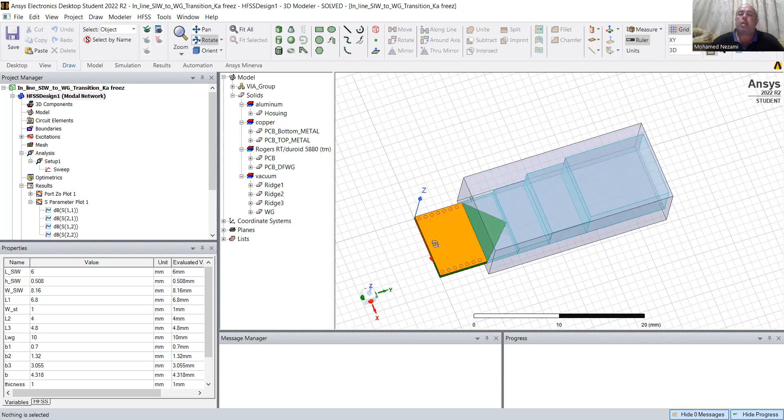substrate integrated waveguide, which is nothing but a printed circuit board. And you can refer back to my videos. There is a whole video on SIWs, so you can refer back to that video for this purpose. I welcome you to do that if you like.

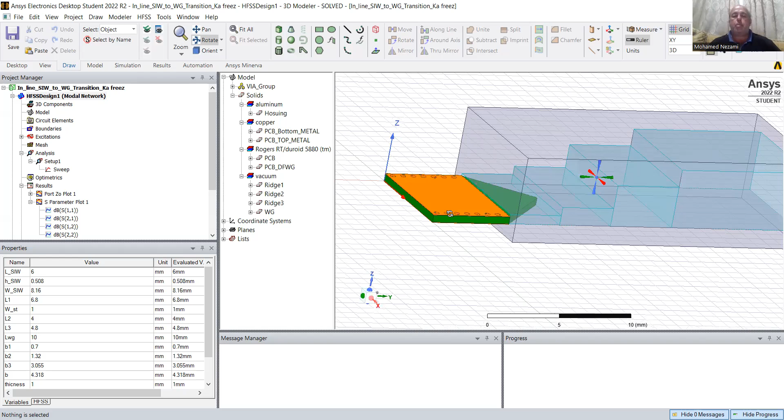But anyway, it's basically a PCB that is double-sided, top and bottom, as you can see here, and it's stitched with vias along the sides in here. And this actually, when you feed it via an RF signal on this side,

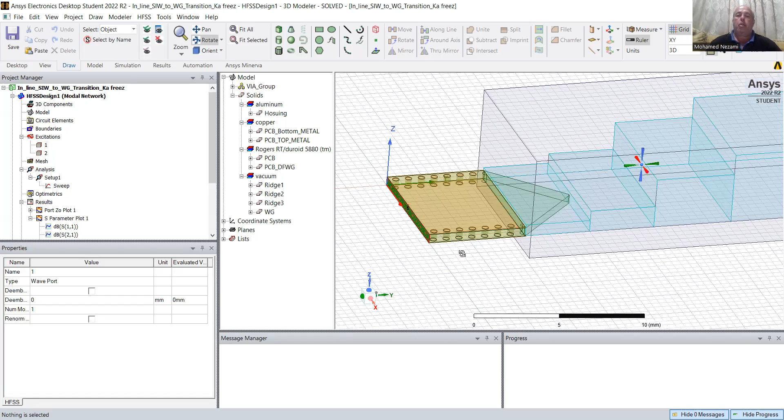it becomes a waveguide actually. The only thing about it is the height is the substrate height, basically. It's a reduced size waveguide, basically, rectangular waveguide, okay?

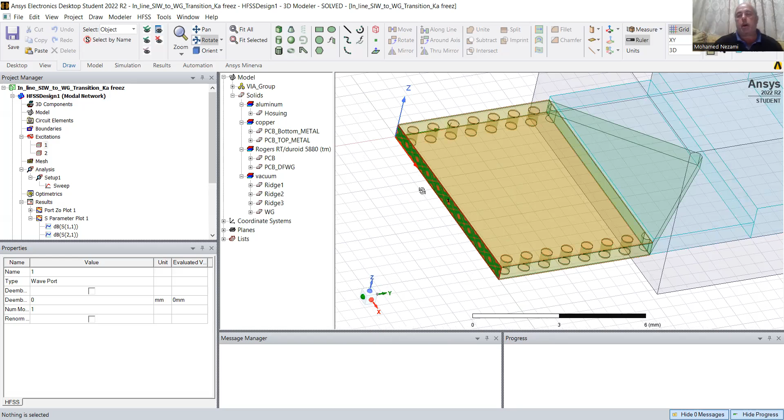Now, for the TE10 mode, it doesn't really matter how high it is. It's just a matter of impedances. But for the mode to propagate and for the cutoff frequency, the height becomes basically irrelevant. It's not an issue as far as propagation or the mode, okay?

Now, why do we use substrate integrated waveguides? Because usually we have this in a transmitter or receiver. We're either getting a feed from here, the signal comes from an aperture of some sort, a phased array aperture, or a single parabolic dish, or a patch that is fed by a waveguide.

And then eventually we have to get that signal into planar form so that we can process it. Meaning for the downlink, it's basically the low noise amplifier and the block down converter, and then the digital signal processing section that implements the demodulator.

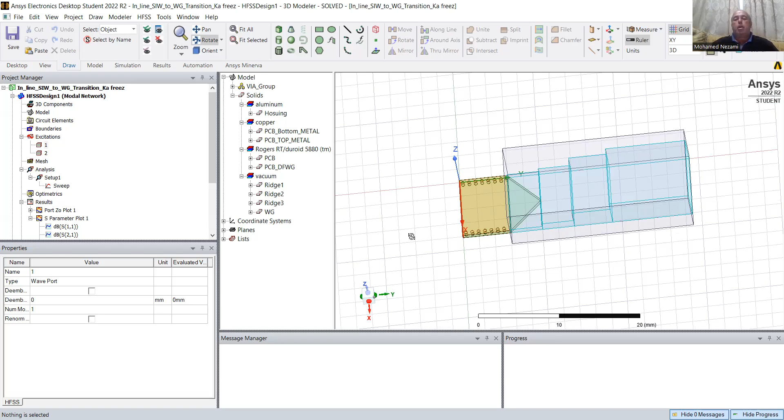Likewise, it's also usable when you have a transmitter on this side and you want to transmit the signal. This signal here might come from a GaN power amplifier, and you might want the output to get fed to a parabolic dish or an aperture, going from the substrate integrated waveguide, SIW, here, we have to do some kind of matching because the impedance looking into the waveguide...

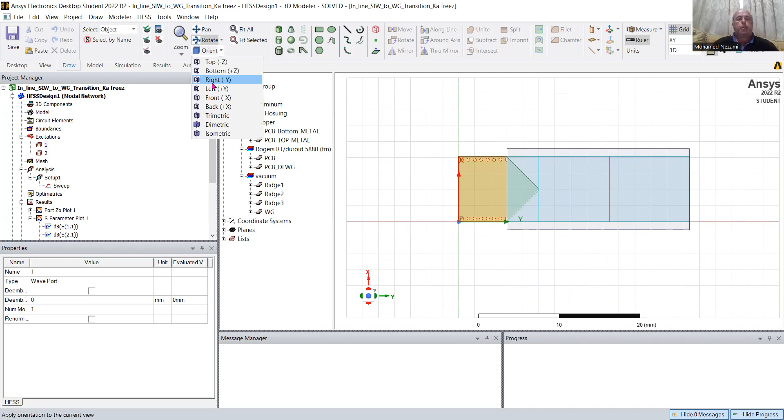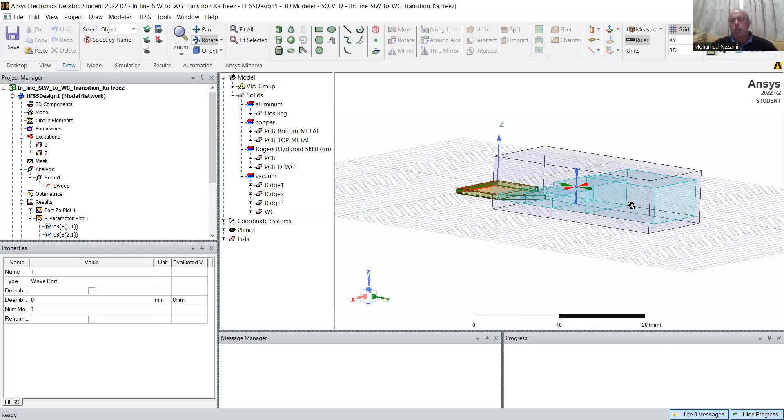Let me look sideways on this so that we can see it better. So, this is the SIW. We come into the SIW and then we have some kind of stepped ridge waveguide. What you see here is that the dark color is basically the air-filled cavity inside the waveguide. So this section from here to here is the standard waveguide.

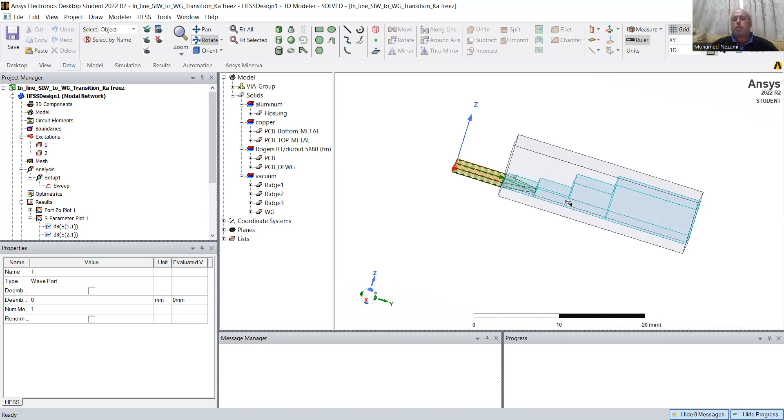And this happens to be in the Ka band. And then from here to here, we have a stepped height, which is basically a Chebyshev transformer with a quarter wavelength each length. The purpose of this is to match the substrate integrated waveguide, the printed circuit board here, to the TE10 mode here, okay? In a minute, we're going to see how that is done. So let's get started.

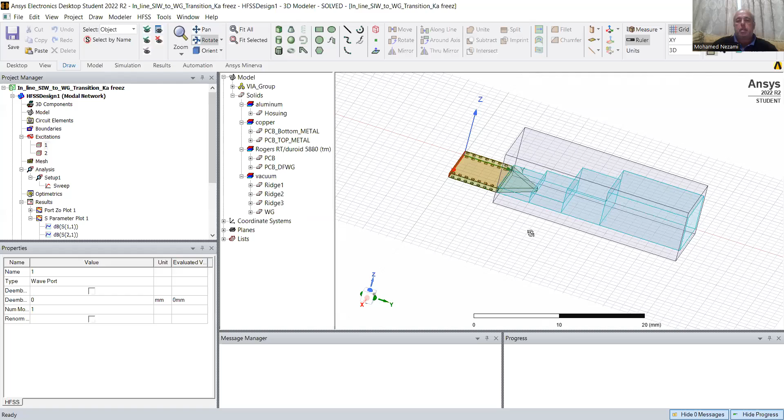Between the SIW and the standard waveguide, there are sections - three sections in here, basically a Chebyshev. So we have the SIW, the substrate taper, which is in here, and I'll talk about that in a minute. Then we have these three sections of a Chebyshev transformer. The first one is loaded with a dielectric, an extension of the dielectric of the substrate, the SIW. We strip the copper from this one and have a little taper that takes the signal, as you can see here. This is basically the taper section, an extension of the substrate, so it goes in like this.

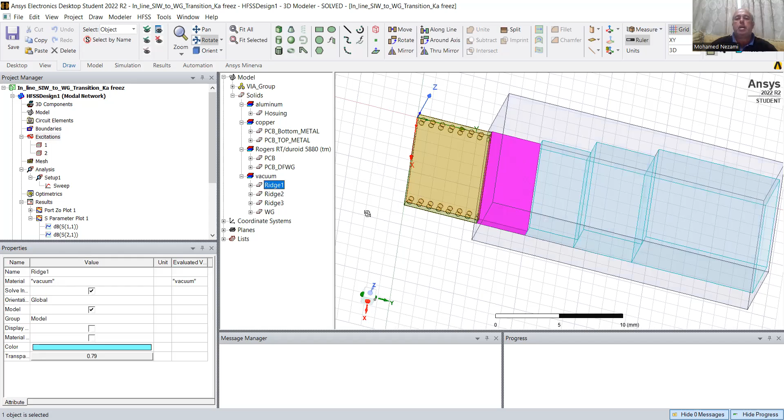The reason to do this is because we need to make a gradual transition for the E field so that we don't get reflections. There's more to it that's beyond the scope of this session right now. So having this section here - this first one in here is really a dielectric loaded, or dielectric filled, waveguide. So we've got a substrate integrated waveguide, we've got a dielectric filled waveguide, and then we've got three sections of air-filled waveguides.

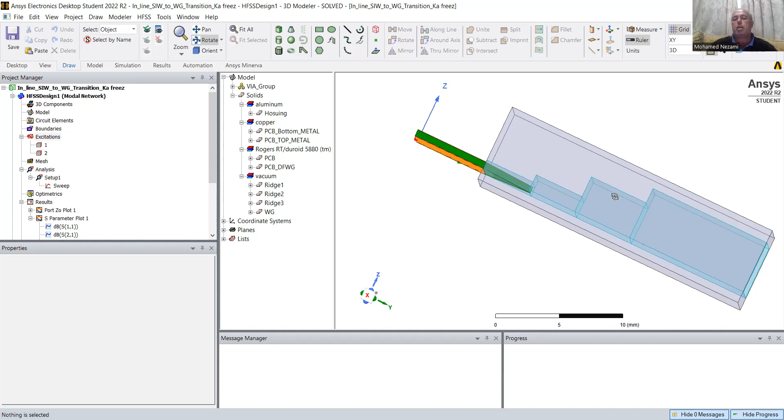The thing about these is that the height of these varies and gradually changes until you get to the standard waveguide that is for the rest of your system.

Let's get back. So again, we have the sections that we have in here - four sections. We have a substrate integrated waveguide, we've got a dielectric filled waveguide, which is just a small section of a Chebyshev transformer that has a tapered section of the substrate material, the dielectric material. And then we have three sections in here - all three are the transformer that matches the substrate integrated waveguide to the standard waveguide. That's what it is.

Usually, the standard waveguide has an impedance of, say, 260 ohms in this case - I think it's 260-something ohms. And then the substrate integrated waveguide has an impedance somewhere around 23 ohms, depending on the width that we have here. So we need to match 20 ohm to 260 ohm, and we do this in the middle. That's what we're going to present a little bit, but it's all simple basically, and it's a matter of using tools like ESOF, ADS, AWR, Genesis, and SystemVue.

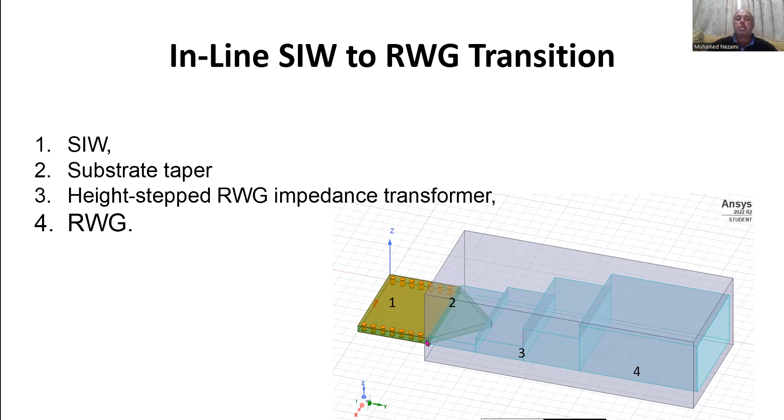We have a multi-section quarter wavelength design calculator in there. So you can calculate, you can give it basically the impedance in here and the impedance in here, and it does the matching for you.

So why do we want to do this? Why is this transition unique? First, the assembly is compact because the waveguide comes in and the feed goes out on the same axis, so there's no perpendicular sticking out pieces. The other thing is that the field propagation direction in the waveguide is the same as the planar transmission line, which has some benefits as far as design difficulty and so on.

Then of course we've got matching elements between the dielectric filled waveguide, DFWG, and the rectangular waveguide, which can be based on ridge waveguide sections. It's low cost, much lower than, say, because all this is a printed PCB that you get fabricated. There's no components to assemble on it, no soldering, and there's a waveguide assembly. You just plug it in, or sometimes they put epoxy or some sticky material in there, and you just plug it in. That's it, no soldering, no screws, nothing. So it's low cost in that sense.

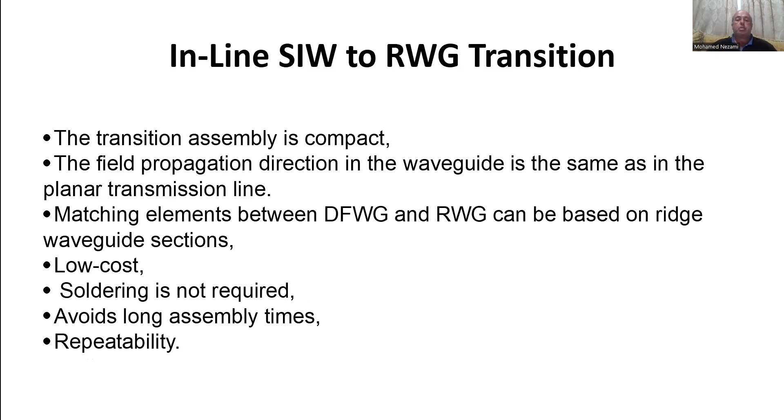Now, why SIW? Why not microstrip or stripline? Because we have those transitions and we've covered those. In fact, the next video talks about a microstrip line to rectangular waveguide in-line transition. I'd already done it and was going to present it in this session, but it would have been too much, two of them in one video, so I split them up.

So SIW first: it has low loss transmission compared to microstrip lines, especially at Ku, Ka bands. You can refer to books on that and look it up to see why. It can handle high power because it's really a waveguide, a TE10 propagation mode waveguide, unlike microstrip, which has limitations on that.

It is suitable for integration, same as microstrip line, because if you have a low noise amplifier, it would be the same card that comes in and has the SIW into the waveguide assembly. That one has the LNA or the power amplifier assembled on it as well. It's also suitable, easy to fabricate, as we mentioned already.

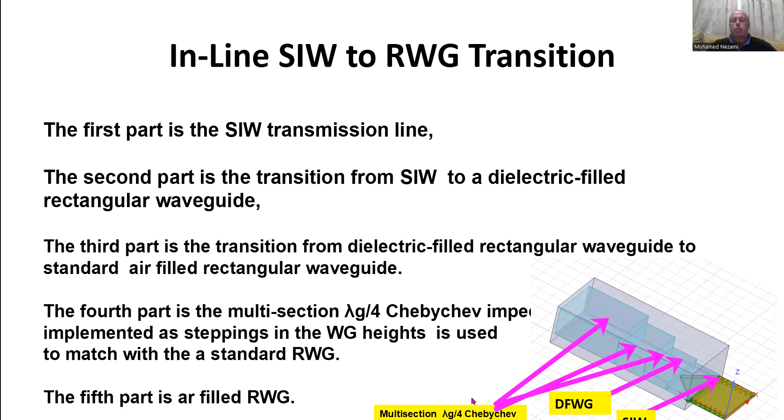The fourth part, in this case, is the multi-section lambda G over 4 Chebyshev impedance transformer implemented as a stepping in the waveguide heights, that's this guy here. The fifth part, sorry about the typo there, is the air-filled waveguide, which is a standard waveguide here.

Now, an important remark: we know that the height of the dielectric filled waveguide is equal to the substrate height, or thickness, but the width is exactly the same width as the waveguide. So as you can see, this waveguide and this waveguide have exactly the same cutoff frequency, supposedly, even though they have different heights. The height basically only affects impedance.

TE10 mode propagation is related to the width, the A width of the waveguide, which is the broad width. Therefore, reducing the height B of the reduced air or dielectric filled rectangular waveguide does not affect the propagation of the TE10 mode inside the waveguide or inside the stepped ridge transformer.

Now this shows an example. Of course, why would we have 3 in here? I just happened to pick 3 for myself, based on the fact that many publications I've looked at used 3. They said 3 is sufficient a lot of times for practical bandwidths of signals like 5G signals and SATCOM signals, for the bandwidth that they have.

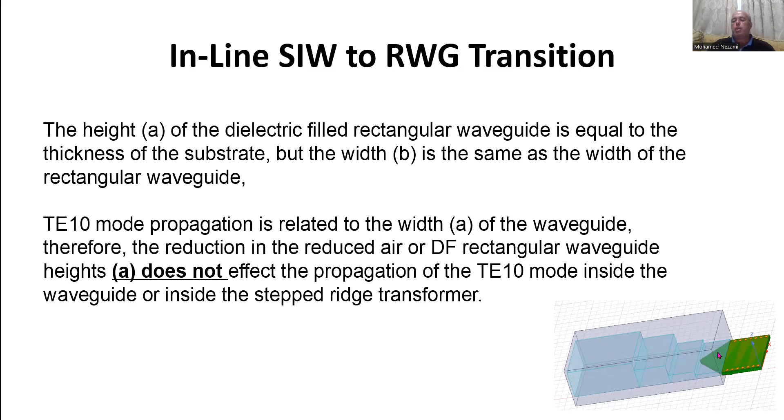So in the waveguide, the height is proportional to the impedance. If this standard waveguide section has 260 ohms, you can see this one is almost like 70% of that, maybe 200 ohms. If this is like 260, this would be like 170 or so, and this would be like 120, and this would be like 70 maybe.

And that's what you end up with a lot of times. So you could implement this transformer, the one that Pozar showed, and some of the calculators can come up with these impedances. These impedances, of course, the length is equal - it's quarter wavelength. That's the starting point, but the actual final designed optimized lengths are not the quarter wavelength.

They deviate a little bit because we really don't have a source and a load that is pure real - we always have susceptances. And of course the steps, the sudden change in impedance, that's capacitive parasitics that we don't account for in this calculation of these impedances. That's why when you put this in, you get a nice plot like this, with minimal ripple.

But as soon as you implement it with those same impedances, be it waveguide or a metal ridge to a coaxial inline transition like I did in the last video, it doesn't come up exactly optimized. That's where the beauty of and the need for 3D modeling using HFSS or some other package, CST or whatever, comes in - where you put it in, parameterize it, run optimetrics, and get it optimized.

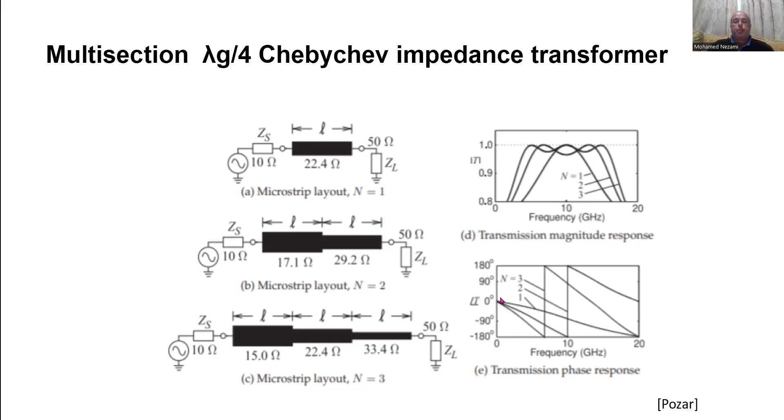Now, last time we did this transition - a coaxial inline, coaxial to waveguide transition. In there, we took the inner conductor, and it has a ridge that transformed the impedance from coaxial impedance, 50 ohm, to the impedance of the waveguide, which was somewhere between 200 and 300 ohms, if you recall.

Now what we're doing is a little bit different, but it's the same principle. So we have a waveguide. The way we start designing this is we have a waveguide that you pick as your standard waveguide to implement your system, or you're given that most likely. The first thing is you want to find the impedance of that waveguide - you take the ratio of B over A, and then you can get that number.

And then, of course, you have the impedance of substrate integrated waveguide. There are equations to do that. And then what you need to do is, from here to here, come up with a series of transitions stepping in heights until you get from the SIW impedance to the waveguide impedance, which is calculated here.

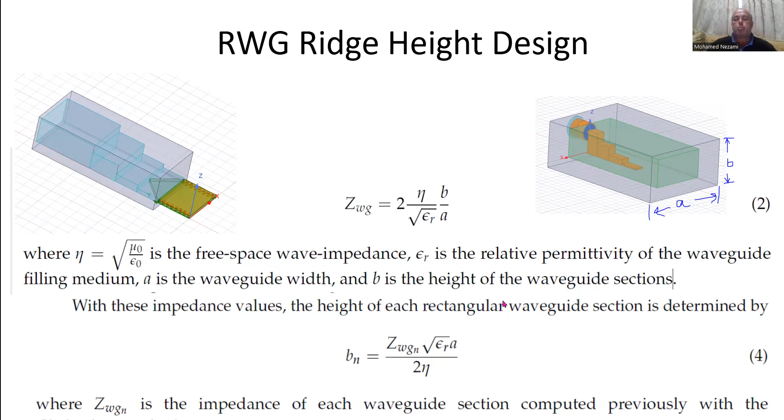So it's very straightforward. So again, what I did is I got a few things that can help you do that design and understand the theory. The first one is chapter 5 in Pozar's book.

And for Pozar's book, you don't have to go out and buy it. There's so many people—I don't know, it might be out of print and doesn't have a copyright—but unfortunately for them, there are many places that have the book in PDF. I don't know, the edition shown here is the 4th edition. This is a very popular book. They're way out now, 6th or 5th edition—I forgot how many they went.

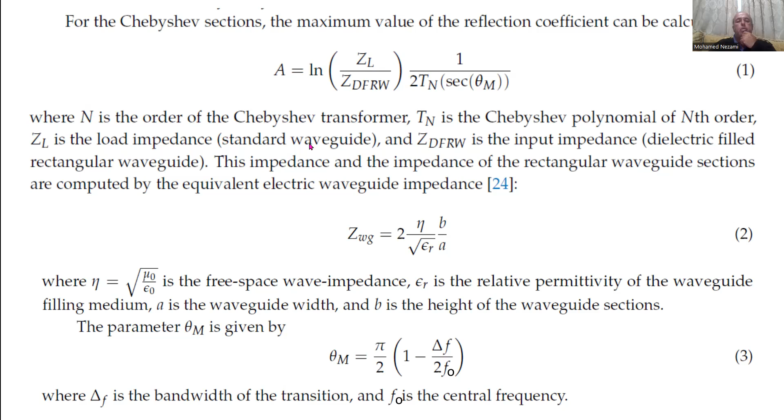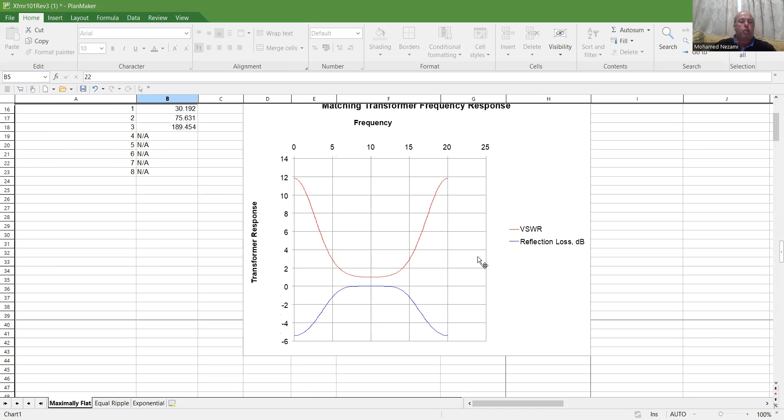Now let's go to—like I said, many people made calculators for this. So here's one calculator, this one here. You can do maximal flat, you can do equal ripple—equal ripple is basically Chebyshev—and you can do exponential. There's even one that has a Klopfenstein, the tapered Klopfenstein transformer.

So you can see here, for instance, if the input impedance is 50 ohm, and let's do the one in our case, which is about 20 ohm, and the waveguide impedance is 267. Of course, we don't want to go 8th order, but if we go 3rd order...

Okay, so we got these impedances: 54, 73, 97. And it gives you some calculations here of basically the impedance ratio, fractional bandwidth 160%, the worst case return loss. Oops, that doesn't make sense here—oh, because of the frequency.

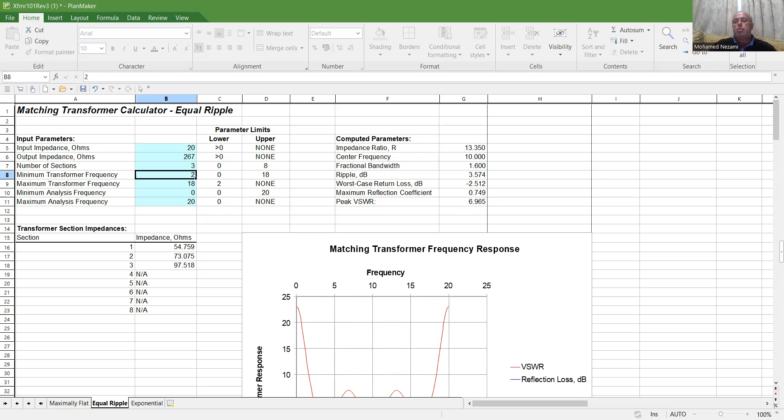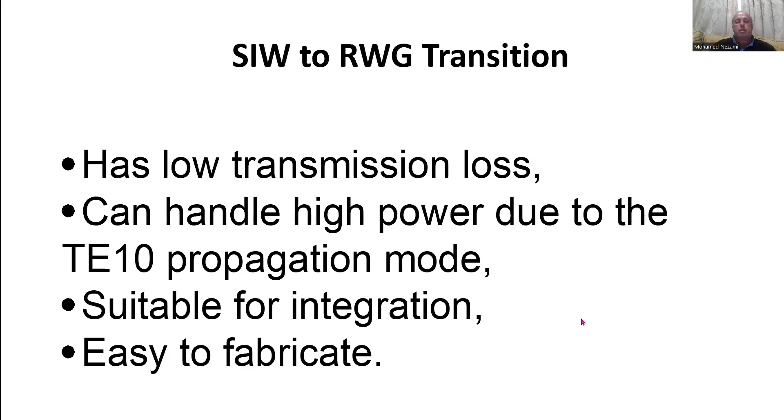Anyway, so you can use this, and if you don't like to use that one, there's some MATLAB code you can use. All right, so let's get back to here—I apologize for this, this is not PowerPoint—oops, what are we doing?

Oh, I clicked on that link. Okay, so let's get back to this.

So let's go to the design. The first thing I did here is I designed the substrate integrated waveguide. Once you do that, you have the SIW section. The length doesn't matter since it's just a piece, so you can grab say half an inch or one inch. The material is Duroid 5880. And this is what I got: the cutoff frequency is about 15 gigahertz or so.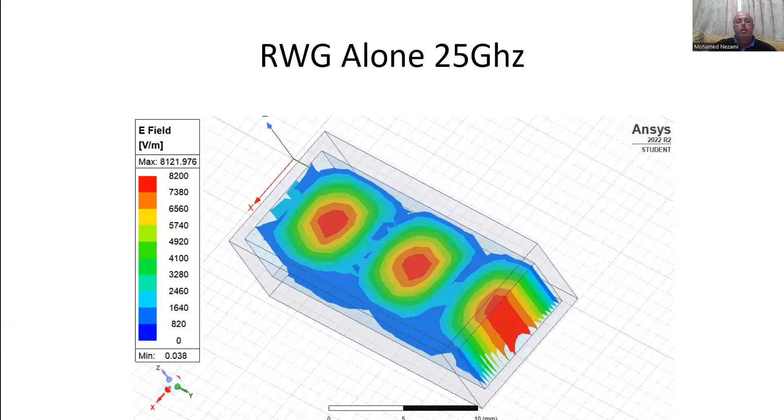And then finally it's to the waveguide. Oh, it's 360, not 260 - I apologize, I said 260. So you can see the impedance of the waveguide, and you're sure the waveguide is fine.

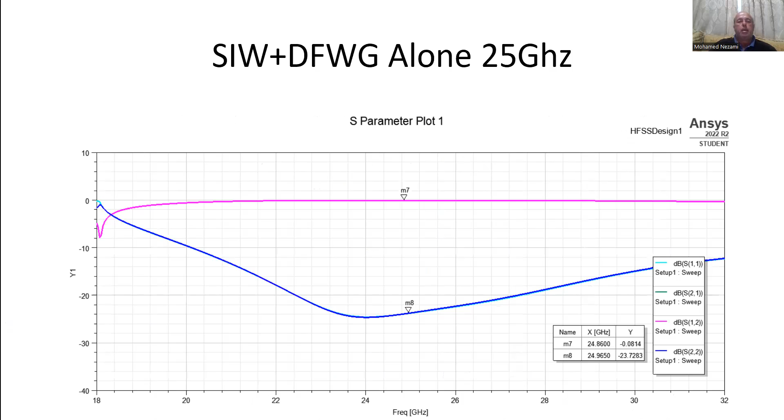And again, you start building piece by piece. So you go back and put the dielectric filled with the first section with the tapered part, and we see it's working fine and the performance is good. Then we go to the next step, which is the dielectric filled with the 3 sections, without the waveguide and without the SIW. We verify that it works - good return loss and impedance-wise.

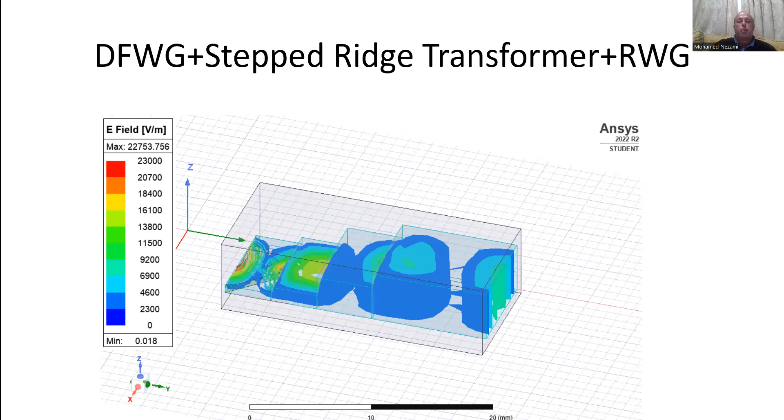And then finally we put in the waveguide, and we get this response, okay? We are sure now it's fine. And then finally we put it all together, and that's what we get. We verify the E field is fine, there's no leakage anywhere. So you can see here that we've got from 22 ohm to 360 - that's the impedance on the SIW, and then the 360.

Now, somebody might ask, why didn't you start with 50 ohm? Well, it just happens that when you start the SIW, you don't want to design for 50 ohm. We're usually feeding some kind of LNA or power amplifier, so that's not a problem because we can change that design - it's not exactly 50 ohm. If you want to go to 50 ohm, you have to transition from a substrate integrated waveguide to 50 ohm. I think we did that in one of the videos on substrate integrated waveguide filters - we went through that, so you can refer back to that video.

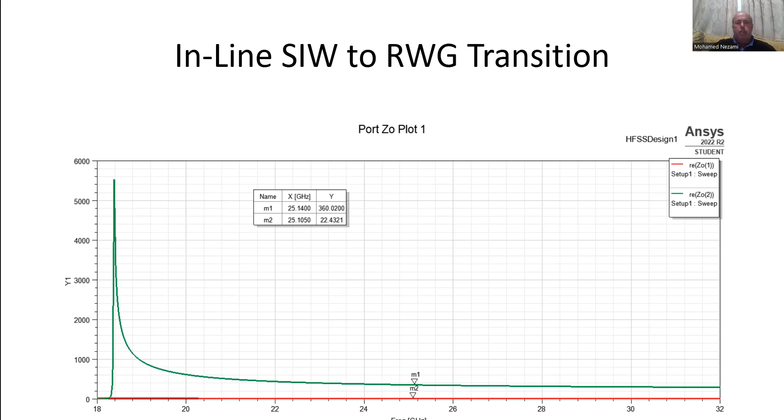So this is the final transition performance. As you can see, it's pretty nice, and the loss worst case is like 0.2 of a dB, up to 28.5. And then the return loss, of course, is this. Now this is pretty good considering that it's a board, not a waveguide assembly.

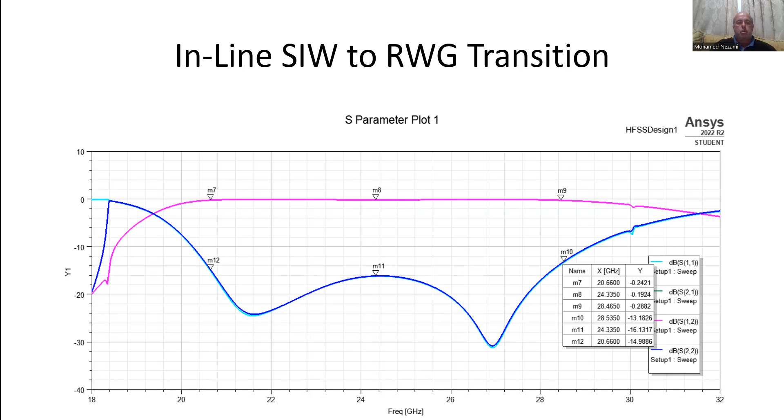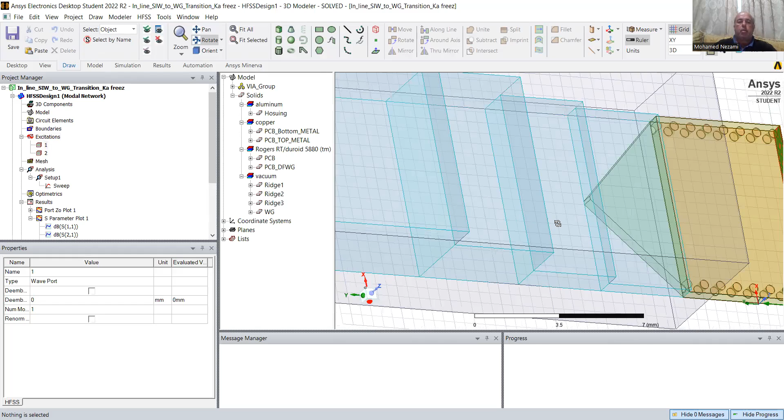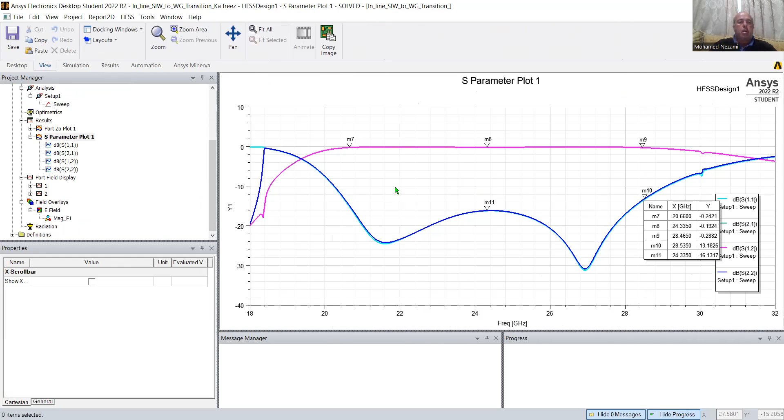All right, so let's go to HFSS and just show this. So we've got this - we feed it on one side with the wave here on the substrate integrated waveguide, and then on the other side we feed it with this wave. And then we run it. This is, of course, the performance - the impedance on both sides is basically this. So we got 22 ohms, 360 ohm for the waveguide, this one here is 360 at 25 gigahertz and 22.4.

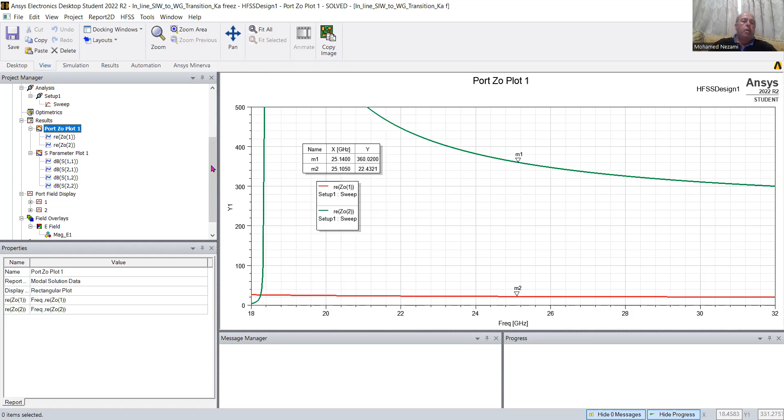And then if you want to see the E field, how it works, let's see at 25 gigahertz - this is what we've got. So let me animate this.

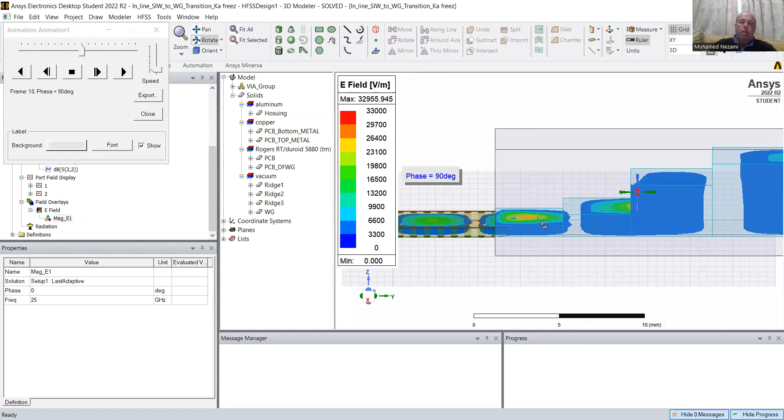So you can see how the substrate integrated waveguide, the wave comes in and starts radiating into the substrate. This is the critical area that you can see here, that's where the E field gets into the dielectric waveguide section, where the height of that waveguide is exactly the substrate thickness.

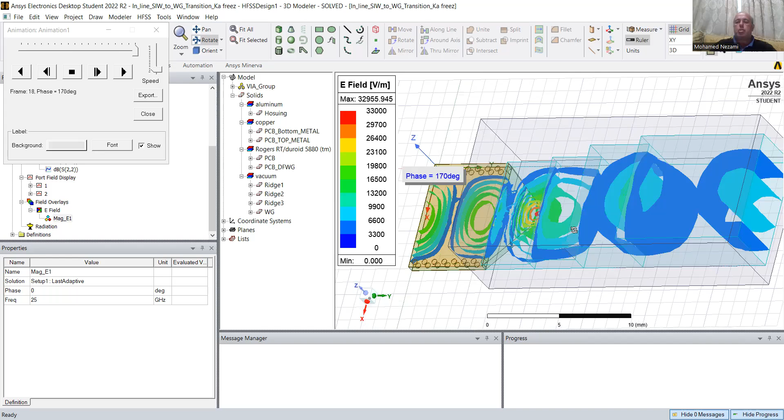And you can see that it gets loaded like a little dam right here. It's contained within the substrate. And then the signal will start gradually building up to the impedance of 300 and some ohms that we just showed, which is a standard waveguide.

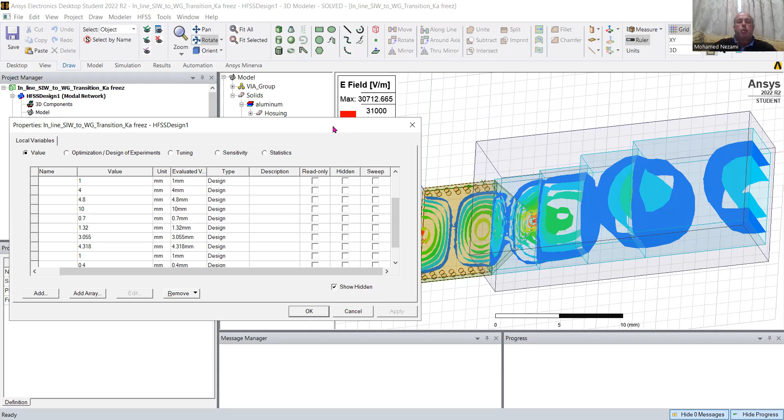Now, the way this design works, of course, you start out with all of these parameters, and they are parameterized. So what I did is I didn't run the optimizer, I just went into the setup and did the calculations, figured out the initial starting point, the quarter wavelength inside these waveguides, one for the dielectric-filled and the air-filled. So you put those in and figure out the height to give you the impedance.

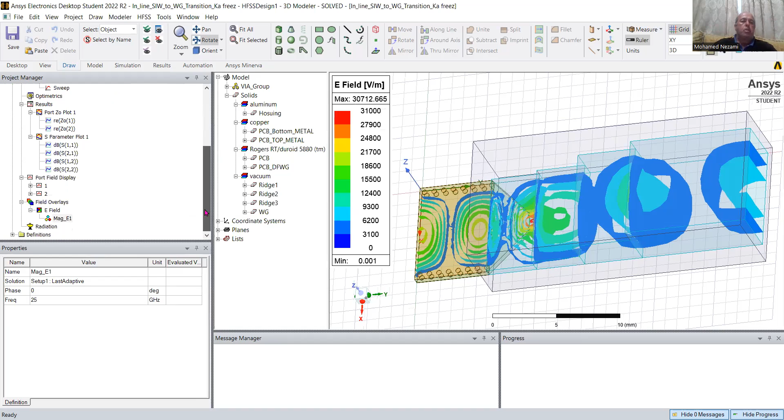And I came in here, and you can go to any of these and start optimizing or sweeping, and then pick one of the curves one by one. But you can really run the optimizer, you can go in and come in. Let's get rid of the E field first, so let's see how we approach optimizing this.

First of all, the length of the SIW doesn't matter. The length of the waveguide, the standard waveguide, doesn't matter. What you have basically is a transformer, these three stages of transformer. So you have the length of this section, the length of this section, the length of this section, and the height of all of these sections. So that's 3 here and 3 here, that's 6 parameters.

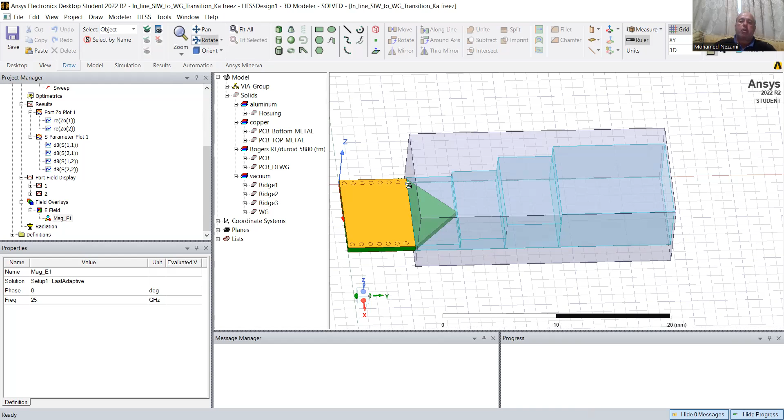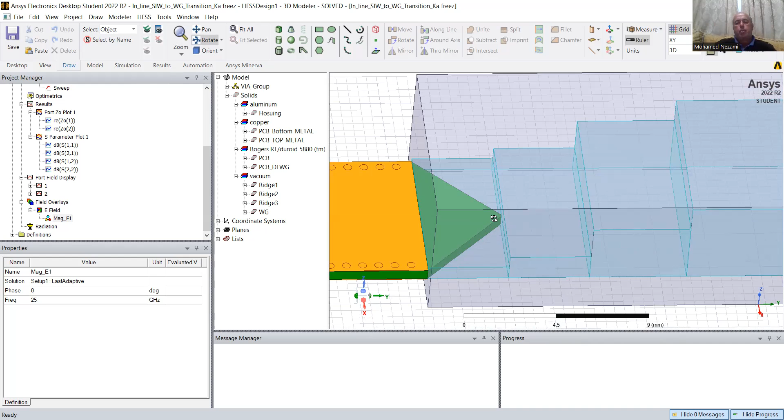And then you have the length, which is really the length of this. That determines the length of the, because the electric field has to hit the first tip in here. That's part of the design, because that's how you make sure this thing goes in. When this hits this, that's part of the assembly, how you get it tied, fixed in there. And if you have some kind of glue that basically locks this in. So this is part of it. So the length of this determines really the length of that.

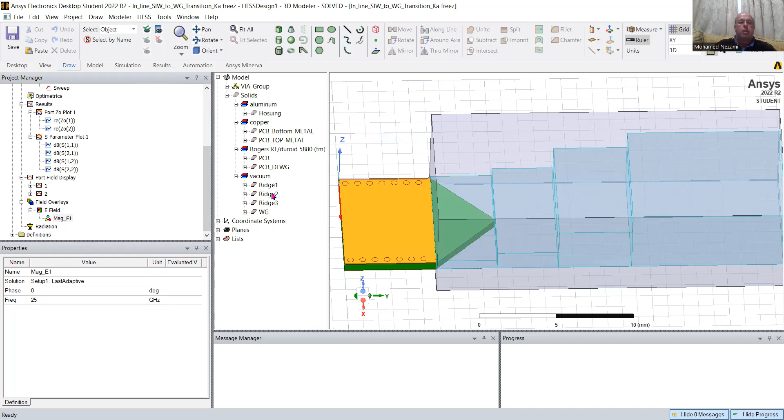So let's pick, for instance, an endpoint. Let's say one of those sections, the middle section in here. If you can see, the Y size is L2. So what I'm going to do is try to tweak L2. I can come in here, go to L2, and then you can put this as tunable. You can sweep it, like this.

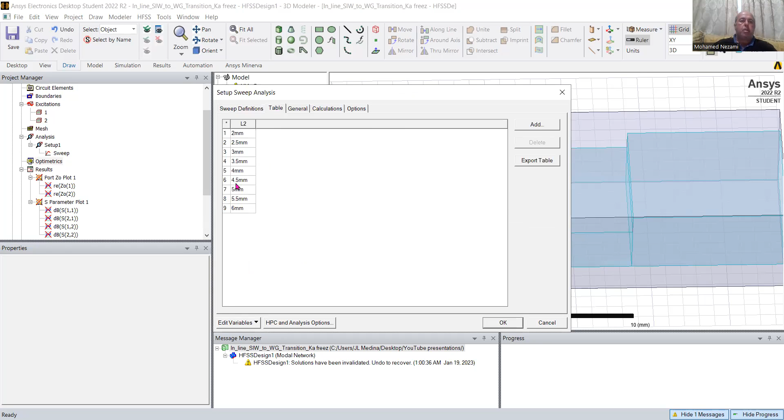And then we come into the optimetrics section in here, and then what we're going to do is add L2 here. We're going to start from 2 to 6 millimeters. I'm going to step by 0.2, or let's say 0.5 millimeters, so it just runs faster. So if you look at the table, that's these iterations. Then we can go to that, and you can come into here and just basically run that.

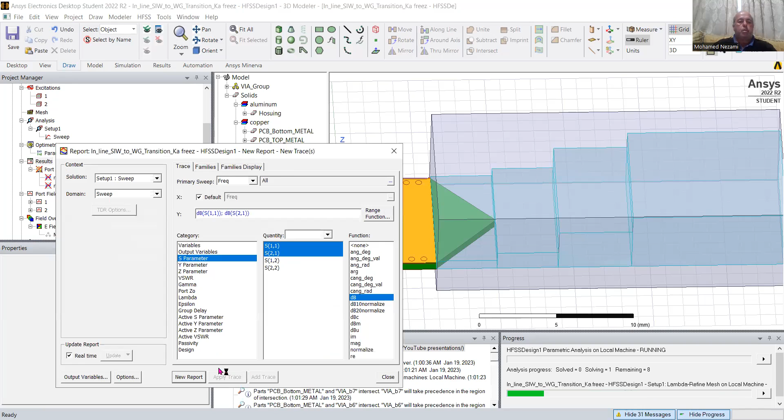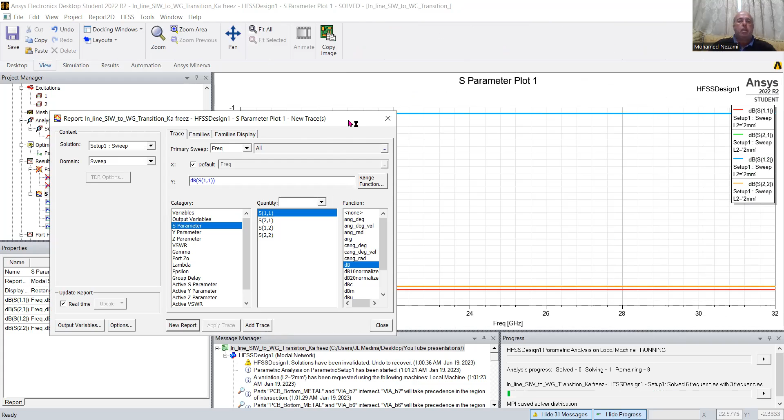So we're going to run that, analyze. So we're going to come in here and let's start fresh, with all of these. So it's going to take some time. Here we go, so it's going to start doing the work, and very soon you're going to start getting results, like it started at 2 millimeters, as you can see here.

Let me get rid of this and this, so we can have it. Now we can go back and put the markers. Let's see the markers at this one and this one, this one and this one. So right now, as you can see, it's sweeping basically at 2 millimeters. Where is the marker? Oh, here it is.

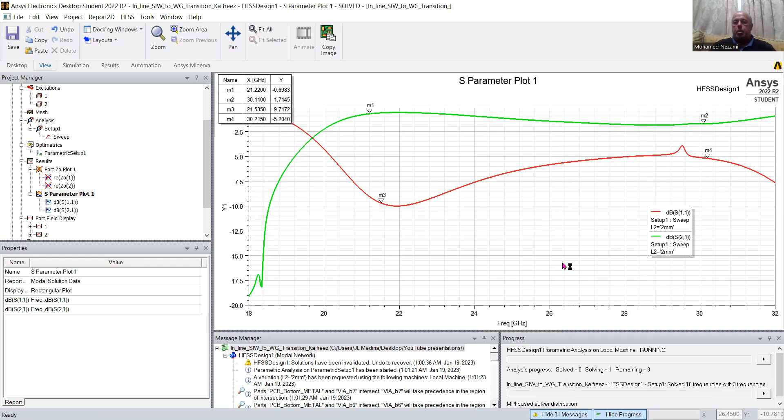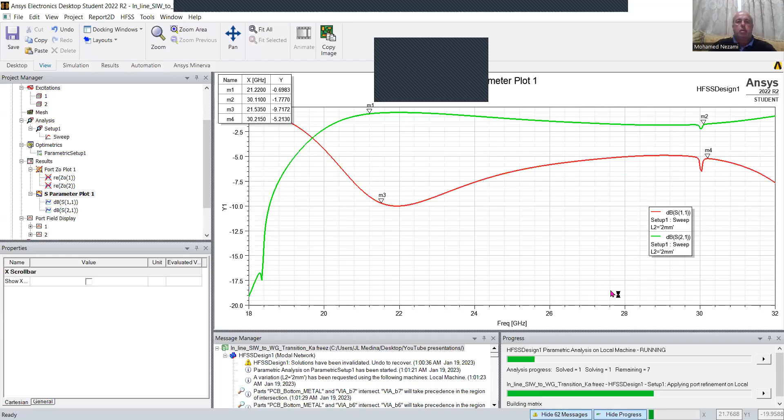Okay, now it's going to put the, let me, while we're waiting for this, let me, why is it doing that? Okay. All right.

Okay, well, let's see, it's going to take some time, but you can see what it's doing basically. You're going to get a bunch of curves and you pick the one that you want.

You can also, instead of doing that, you can actually go in, here's the second one, you can see that. You can come in, see which is better, and then do an optimization. And for the optimization, you pick the parameters that you want, and then you basically add some instructions on how you want to optimize. You want your return loss, say between this frequency and this frequency, that much, insertion loss this much and this much, and then it goes in and runs and does that.